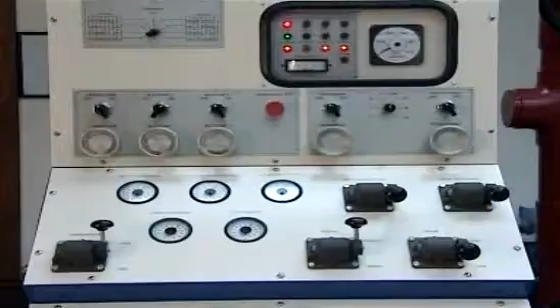As most of these problems can be simulated on the ADC Well Control Training Simulator, this movie is an effort to explain the possible complications, to recognize the indications, and take the appropriate actions in a timely and efficient manner. Welcome to the ADC Simulator, where we make the effort to simulate well control situations which occur on the rig as realistically as possible. In the following few minutes, you will see an enactment of a well control operation and the complications that might arise during this operation.

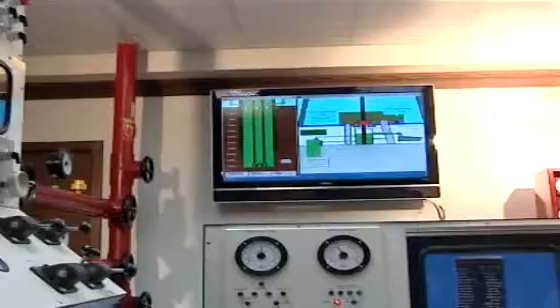Hello, boss. Hello, driller. How are you? Fine, thank you. Hope you had a good rest. Yeah, I'm excellent, in good shape.

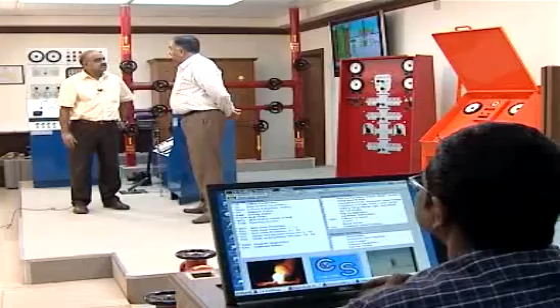Very good. So today we'll be drilling. Okay. And while drilling, these are the parameters you have to keep. Weight on bit will be 25 to 30,000 pounds. Okay. RPM 120. Okay. SPM will be 70. So before you start, driller, make sure all your lineup is okay. Okay. On the rig floor and also on the choke manifold. Send your assistant driller and make sure the lineup is okay. Right.

Check your alarms, and we are entering the pay zone now. Right. So you have to be very careful. Okay. Make sure you set all your alarms. Okay. And if there is any drilling break, please make a flow check. Okay. And if it's flowing, then we will use the hard shut-in method. Sure, sure. Okay.

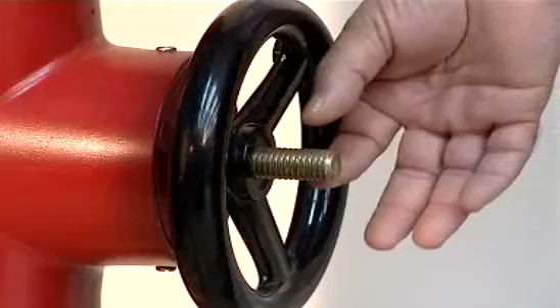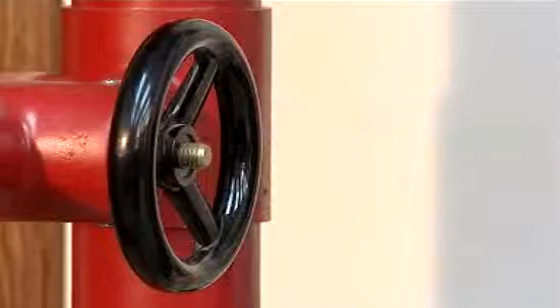I will check the standpipe manifold for correct lineup. Both mud pump number 2 and mud pump number 1 should be lined up. Standpipe number 1, the valve is in open position if the spindle is extended out, and if the valve is in closed position, spindle will be inside. The valve going to standpipe number 2 is in closed position.

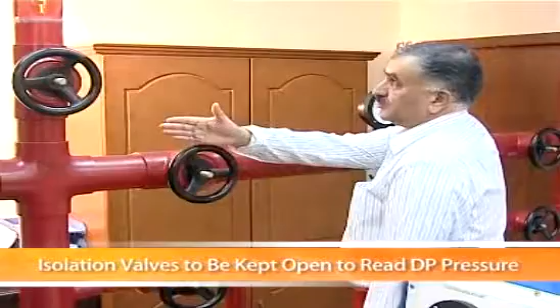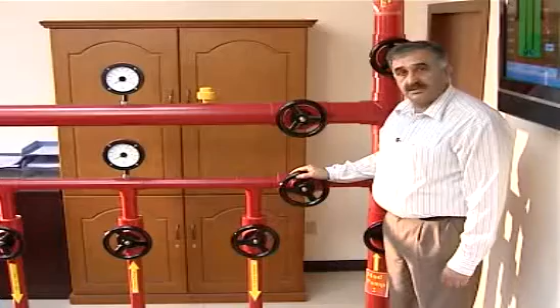This isolation valve in the middle is in open position. Both of these valves are leading to standpipe number 1, which is also in open position. The line coming out from mud pump number 1 is in open position. So both of the mud pumps, mud pump number 2 and mud pump number 1, are lined up to standpipe number 1. All valves on auxiliary lines should be in closed position. Closed, closed, closed, and closed.

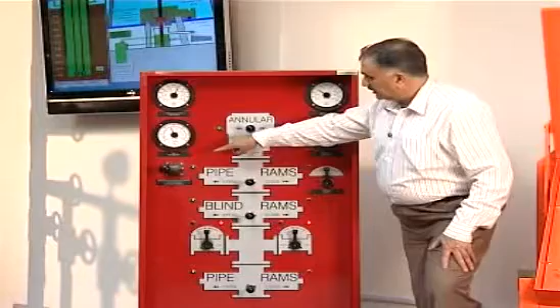Now I am checking BOP remote panel. Accumulator pressure 3000 psi, air pressure 120 psi, manifold pressure 1500 psi, annular pressure 1500 psi. Green light indicates that annular in open position. Green light, upper pipe rams in open position. Green light, blind rams in open position.

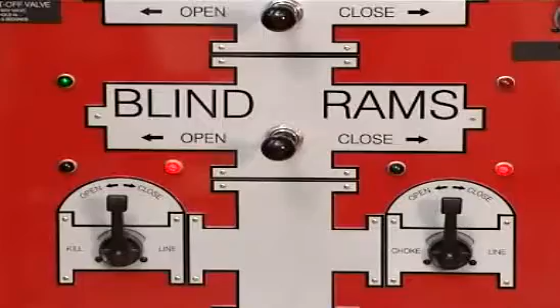Red light, kill line in closed position. Red light, choke line in closed position. Green light, lower pipe rams, which are master pipe rams, are in open position. So all BOPs are in open position. Both kill line and choke line are in closed position.

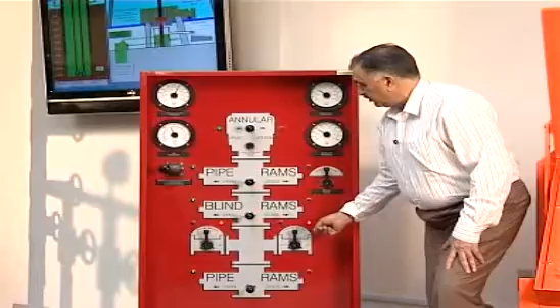As we will be using the hard shut-in method, this is the way we are going to line up the choke manifold. This is the line coming from the BOP and into the block of the choke manifold. From the block of the choke manifold, on this side we have the remote choke which will be in the closed position, and on this side we have the manual choke, which is also in the closed position.

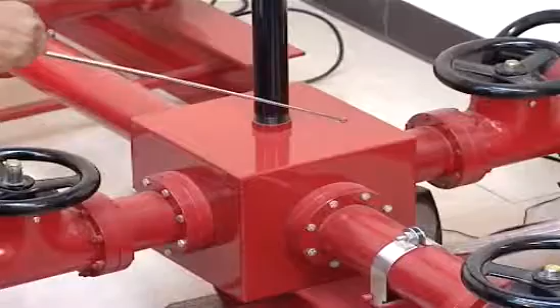The path the mud will take will be from the block through this open upstream valve, remote choke closed, valve downstream open, and out into the mud gas separator. From the block there is also the bypass line with two valves on this line, both of which are in closed position, which is connected to the buffer line, through which it goes to the flare line.

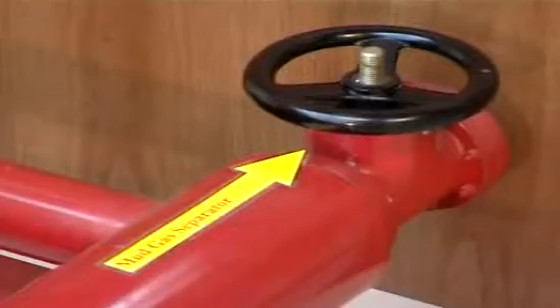This valve upstream of the manual choke is in closed position, the manual choke closed position, the valve downstream of the manual choke also in closed position, and this line also joins the buffer line. These are the gauges mounted on the choke manifold, one for drill pipe pressure and one for casing pressure.

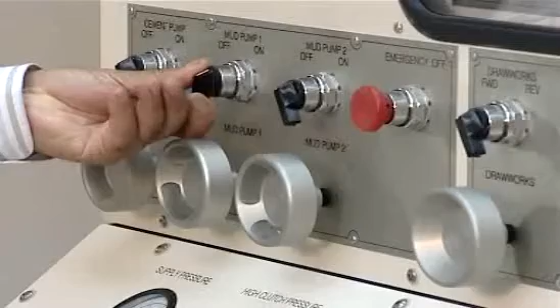To start the engines, press this button. To start the second engine, press this button. Put the mud pump 1 on, and before I go ahead to drill, I will take the slow circulation rate, bring the mud pump to 30 strokes, and I will read the pressure from remote choke panel. Slow circulation rate at 30 SPM, 650 psi.

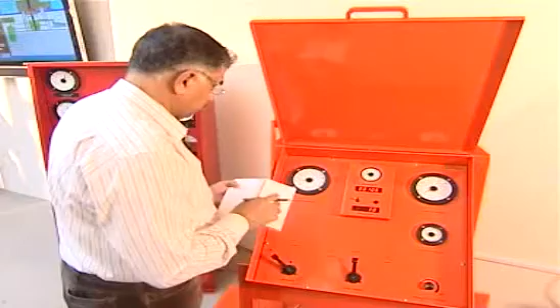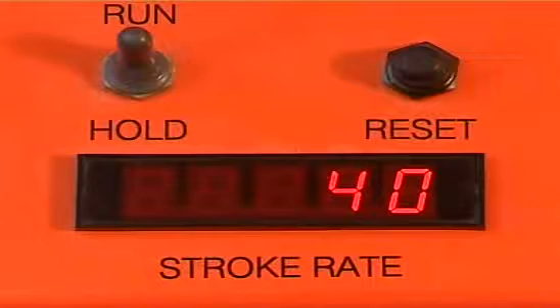I will bring the pump to 40 strokes. I will read the pressure from remote choke panel. Slow circulation rate at 40 SPM, 1150 psi. After taking the slow circulation rate, I will bring the pump speed to 70 SPM, and then I will set the alarms.

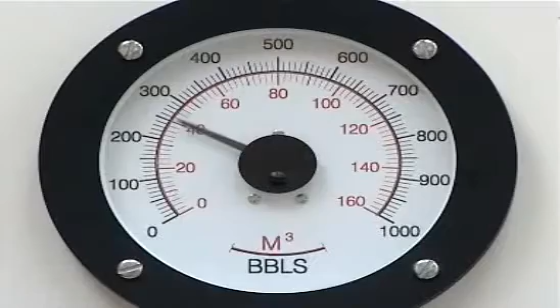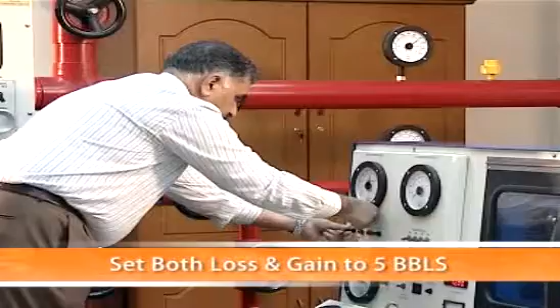Now I will set pit loss and gain alarm. I will switch on mud volume totalizers. For the active system, put the power on. Press this knob to the left and turn lower adjust to the right until I see a red light. Similarly, press high set to the right and turn high adjust to the left until I see a red light.

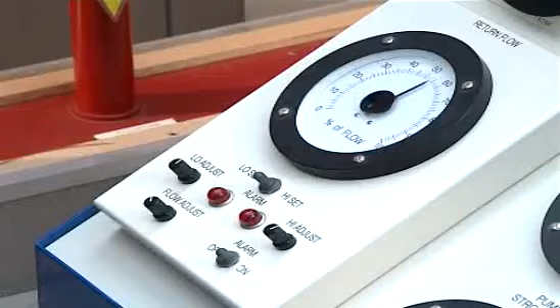Now I will set my flow line sensor for small increase or decrease in flow. So press this one to the left side and then rotate the lower adjust until I hear an alarm. Then press to the right side and rotate high adjust until I hear an alarm. So now you leave it on. Make sure the alarm is in on position.

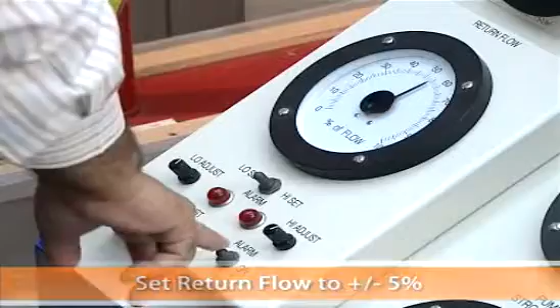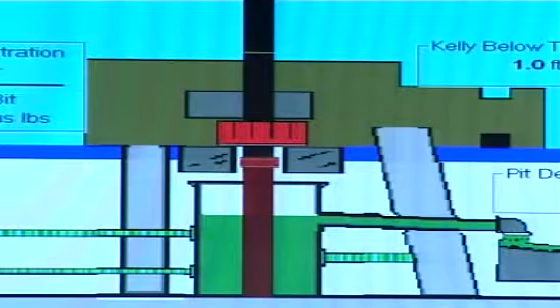I will lower the bit to bottom, and once the kelly drive bushings are sitting inside rotary table, then I will start the rotary. Okay, I'll continue to lower down until I tag bottom.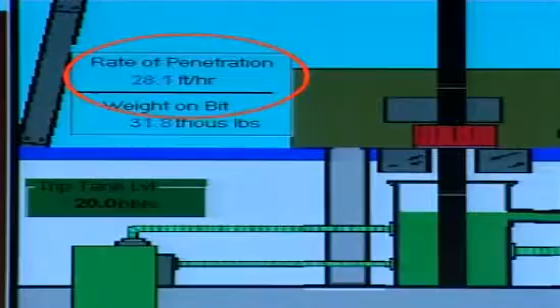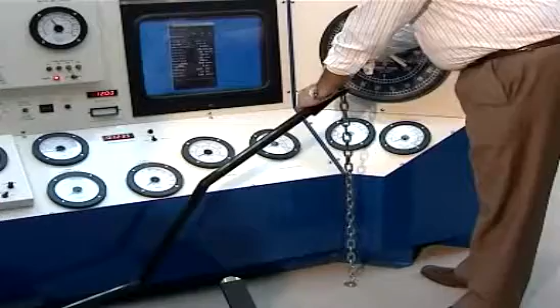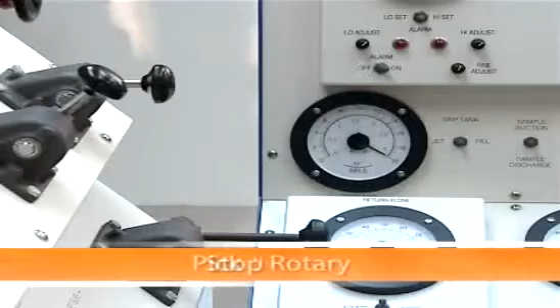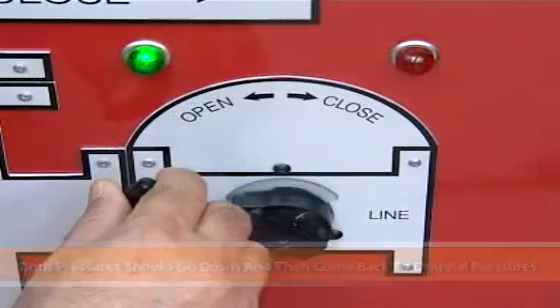I got a drilling break, stop the rotary, disengage the rotary clutch, and now I am picking up. Now I will shut the well in. And open the choke. Well is shut in. Tool pusher, come on rig floor. I have a kick.

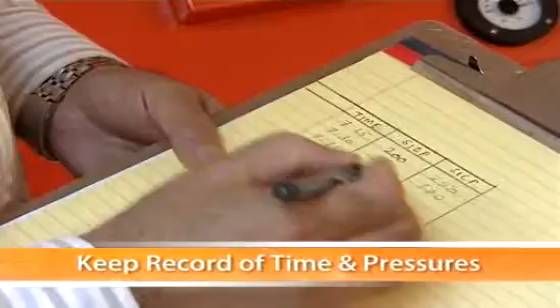Yes, driller, what happened? Well, I made a flow check on drilling break, and the well was flowing. So I shut it in with the upper pipe rams, and I've got shut in drill pipe pressure 810 and shut in casing pressure 900. And what is the pit gain? 4 barrels. Okay, what is the MASP? 1600 psi. That's a very small kick.

I think we can manage to kill it very easily. So I will go just round, make a quick check and come back. In the meantime, you keep monitoring the pressures to check for migration. Make sure that the pressure does not exceed the MASP. But in any way, if it is going more than 200 psi than what it is now, please call me. Okay? Okay.

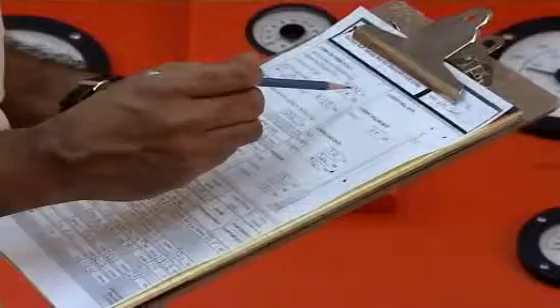Okay, the kill sheet is now ready. The MASP is going to be 1690 psi. We will be pumping at 30 SPM, and the strokes to displace the string volume is 2326. The open hole volume is 1719 strokes. The total annulus volume or the bottoms up is 6513 strokes, and the total volume to kill the well is 8838 strokes.

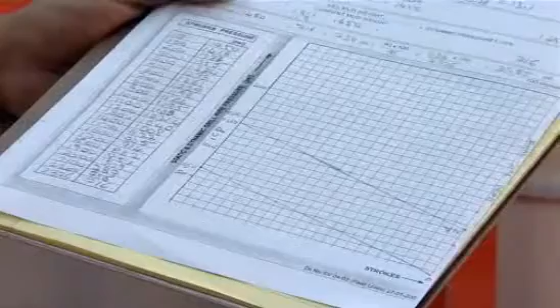The kill mud we will use is 13.2 ppg, and we have the pressure schedule here, the pressure drop for every 100 strokes of kill mud pumped, and these are the graphs for this schedule.

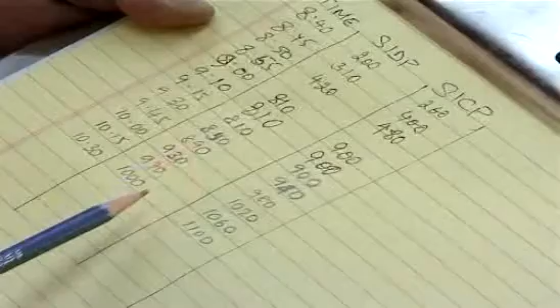The stabilized pressure at 9 o'clock was 810 psi on the drill pipe and 900 psi on the casing. It stayed like that till 9:15, and after that we are seeing some gas migration, and the pressure at this time at 10:30 is 1000 psi on the drill pipe and 1100 on the casing. That means there has been an increase of about 200 psi. As we have had an increase of 200 psi due to gas migration, the first thing that we will do now is to bleed off this excess 200 psi to restore the bottom hole pressure to its original value.

To reduce the drill pipe pressure by 200, we have to be looking at the casing pressure gauge, because there is a time delay of 1 second for every 1000 feet of the well depth. So now I am going to reduce the pressure on the casing side by about 100 psi, and then we will see a corresponding drop on the drill pipe gauge after a few seconds. The drill pipe pressure is now 850 psi. That is about 40 psi more than when we initially shut in the well. So we can now start killing the well.

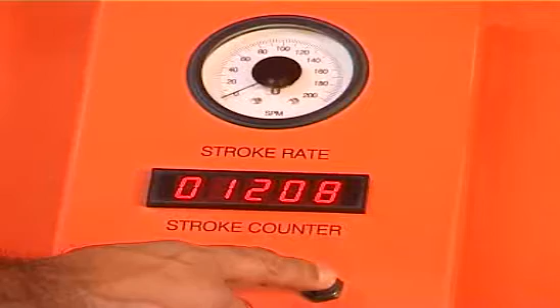Driller, the kill mud is ready, so have the derrick man line up the kill mud. We will be killing this well with 30 SPM using the wait and weight method. So I want you to increase the pump in stages, 5, 10, 15, all the way to 30 as I give you the signal. First of all, we will reset the stroke counter. Okay, driller, give me 5 strokes please. We will bring up the pump to the kill speed in stages, holding the casing pressure constant by opening the choke as necessary.

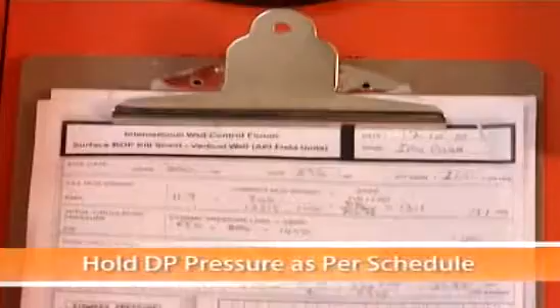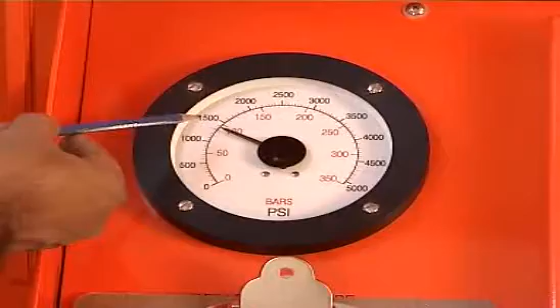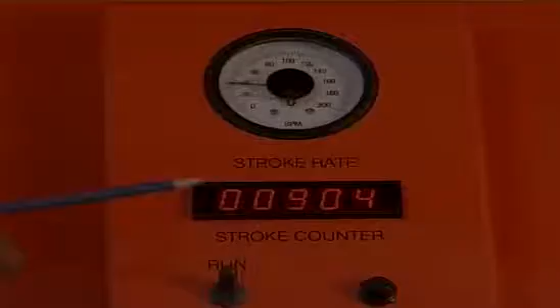Now that we have the pump rate up to kill rate speed, we will now follow the schedule as we have calculated in the kill sheet. We have now pumped 213 strokes. We have a pressure of about 1400 psi, and we need to keep, as per the schedule, 1380 psi, which means we are 20 psi over balance, which means everything is going well. We have now pumped 904 strokes. The pressure is about 1200 psi. As per our graph, we should have 1160 psi. So we have now 40 psi over balance, which means still everything is okay.

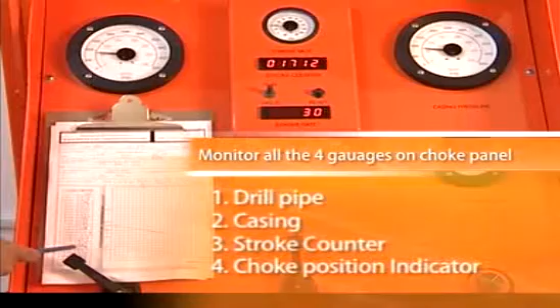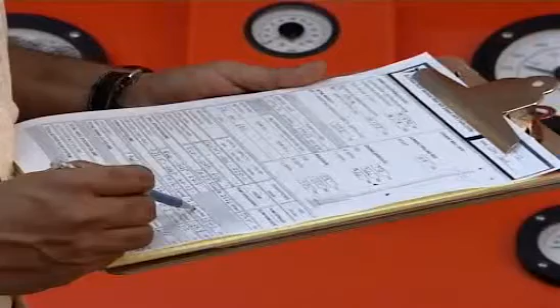We have pumped now about 1700 strokes. On the drill pipe side, we have about 950 psi. As per our schedule, we should be having 915. So we are still over balanced by about 35 psi, which means everything is still okay. The casing pressure has been rising steadily as the gas expands as it comes up the hole. Since we have already pumped 2000 strokes, we do not worry about the MASP anymore, because the influx is already inside the casing.

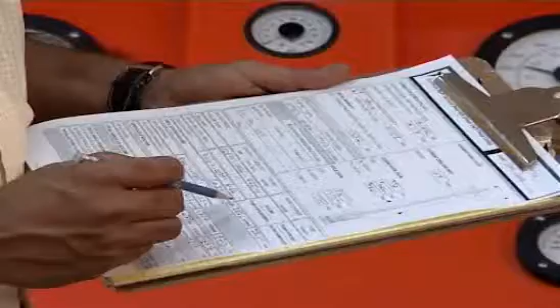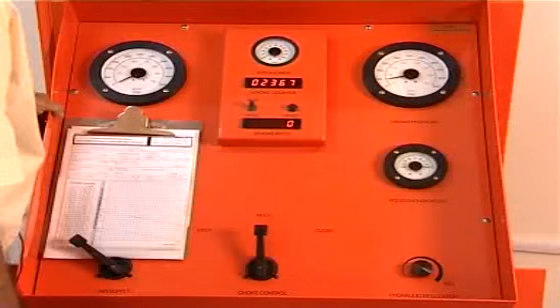We have now pumped 2367 strokes, which means we have displaced the drill string with the kill mud. We are now at the final circulating pressure, which according to our calculation should be 716, and the gauge is showing 750, which means we are 35 psi over balance and everything is okay. We have now shut down the pump after pumping the string volume to check for pressures. The pressure on the drill pipe side is 0. That means the well is dead from the string side.

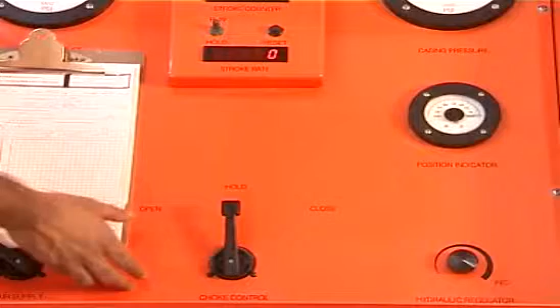Okay, driller, give me 5 strokes please. We will bring up the pump to the kill speed in stages, holding the casing pressure constant by opening the choke as necessary.

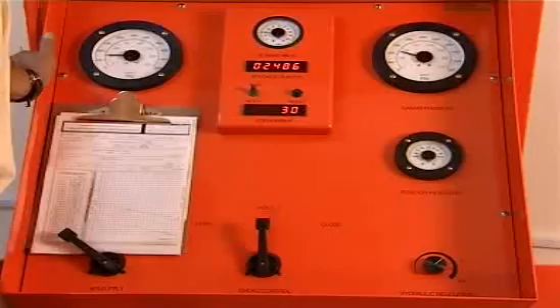Oh, the pressure seems to be going up on the casing side. The casing pressure has climbed up from 1100 to about 1400. That's 300 psi more than normal. The drill pipe pressure also has climbed up by about 300 psi. Okay, driller, put the pump off. Totally off.

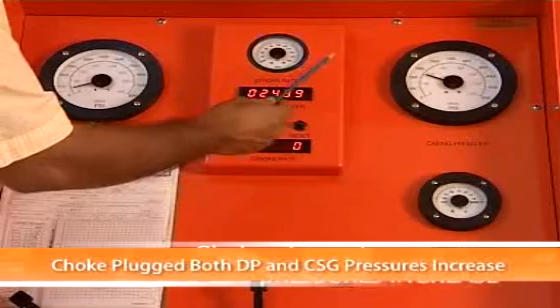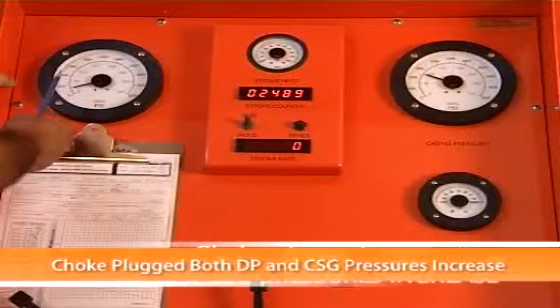We noticed that first the casing pressure started to go up, and after some time the drill pipe pressure also started to go up. Looks like we are having a plugged choke. So I asked the driller to shut down the pump immediately, and I closed the choke as well.

Now the drill pipe pressure should have been 0 because we have already pumped the kill mud down the drill string, but it is showing about 300 psi, which means this is some trapped pressure. So the next step would be to bleed off this trapped pressure and repair the choke or change the choke.

We have just repaired the remote choke, and we are going to start the kill operation again. We will again come back to kill rate speed by holding the casing pressure constant. Driller, 5 strokes please. Ten please. Okay, we are back to the killing operation. Drill pipe pressure is now at 750. Casing pressure still at 1100. Everything seems to be okay.

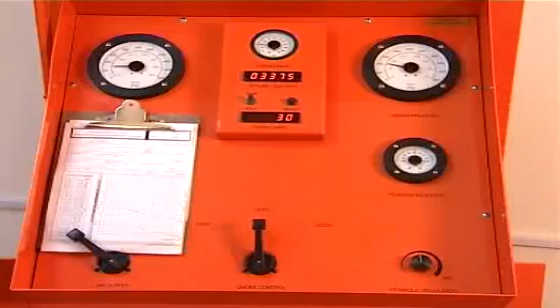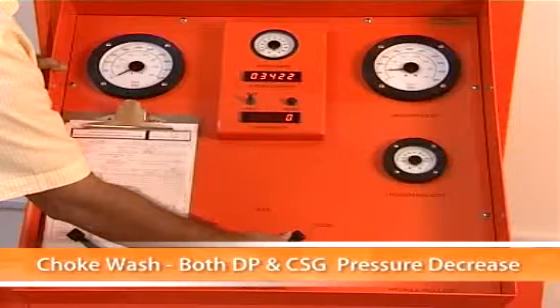Okay, I am seeing both the pressures coming down now. So I am closing the choke. In spite of my closing the choke, there is no reaction. Seems like there is a choke washout. Okay, driller, put off the pump. Since the choke is washed out, I have to close the HCR.

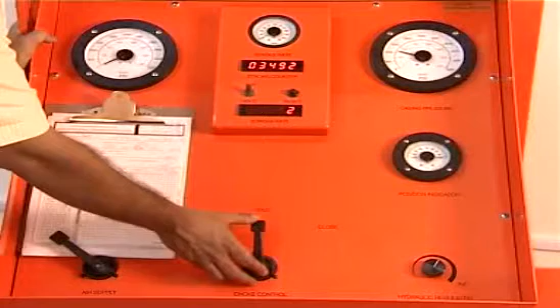Okay, we have repaired the remote choke now, and we're going to start the kill operation again. We will bring up this pump to speed holding the casing pressure constant. Driller, give me 5 strokes please. 15. We are back to kill pump rate, and the drill pipe pressure is showing 750 psi. Pressure is 750. Seems okay.

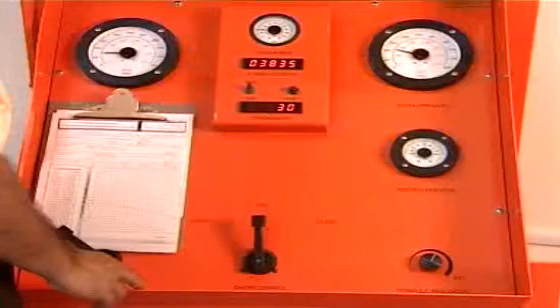Seems like the pump is down. Driller, the pump is off. Call the electrician and let's get it fixed again. Driller, since pump number 1 cannot be started, let's start with pump number 2.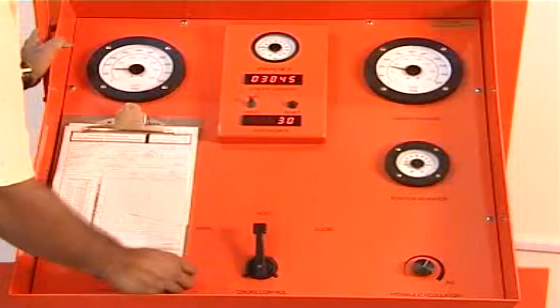We have lined up standpipe number 2 with pump number 2, and we are going to start the kill operation again. We will bring the pump up to speed holding casing pressure constant. Driller, give me 5 please. 15. 30. We have now pumped 3,045 strokes. We are still holding the FCP about 800. Casing pressure is showing about 1000 psi.

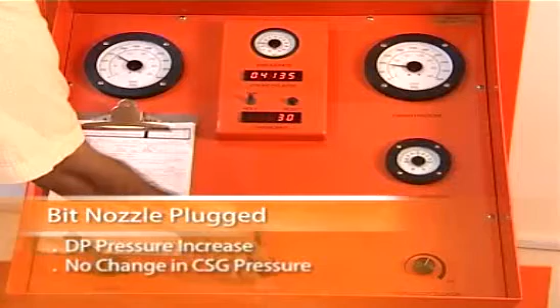The drill pipe pressure has shot up suddenly. There is no change in the casing pressure. Seems like the bit nozzle is plugged. Driller, let's shut down the operation. Reduce by 5 strokes. Shutting down the well, keeping casing pressure constant. Okay, put it off completely, the pump.

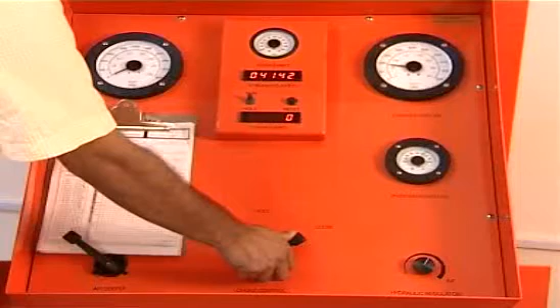Driller, looks like the bit nozzle was plugged. The drill pipe pressure went up, but there was no change in the casing pressure. So there's not much we can do now. Let's bring the pump back up to speed, holding casing pressure constant, and whatever we see on the drill pipe will be our final circulating pressure now.

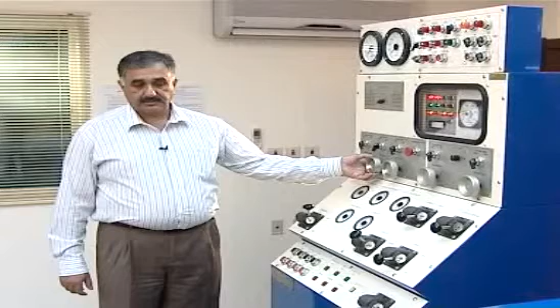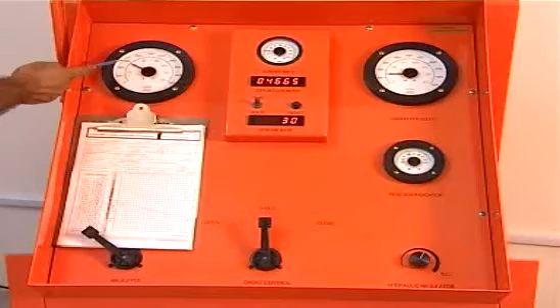Driller, give me 5 please. Give me 10. Give me 15. Give me 20. Give me 30. We are circulating at 1500 psi because of the plugged nozzle. The gas is also coming to surface. We can hear the sound of the gas.

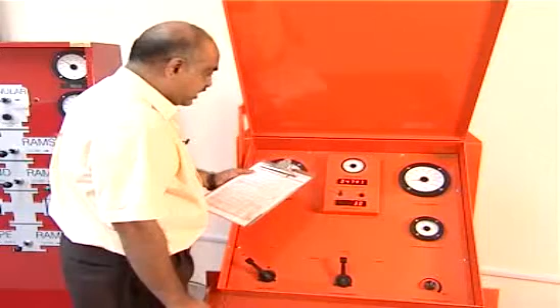The calculated bottoms up strokes was 4794 and we are now almost there with 4756. We can still hear the gas coming out, and as the gas comes out we can see the casing pressure has gone down. Drill pipe pressure is still at 1500 psi, so everything seems to be okay. The drill pipe pressure is still at 1500 psi and all the gas seems to be out. There is no more sound of gas coming.

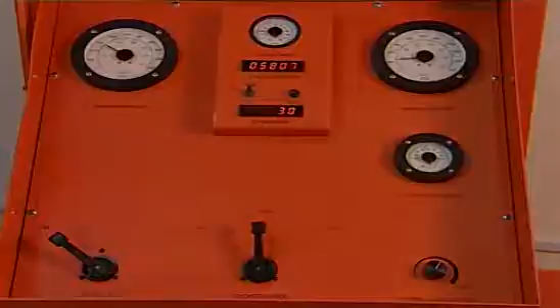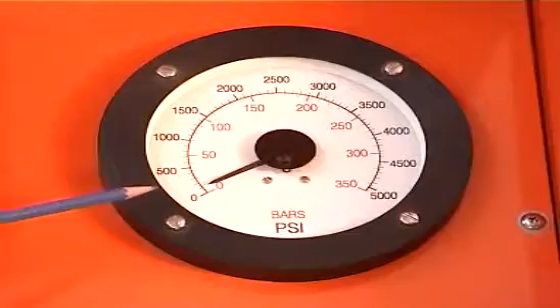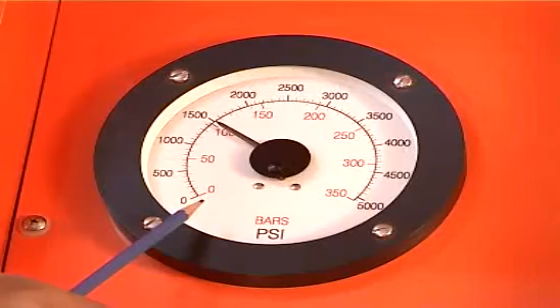We have pumped 9225 strokes. Casing pressure is almost zero. The choke is fully open. Drill pipe pressure is still 1500 psi. It is now time to shut down and check if there are any pressures left in the well. Driller, we will start to shut down the killing operation now. So please reduce the pump strokes 5 by 5.

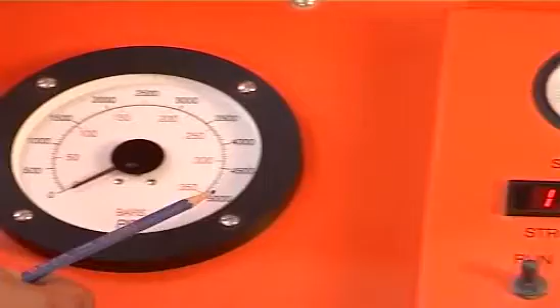Okay. Okay. Okay. Okay. Put the pump off, please. We have pumped about 10,000 strokes now. Drill pipe pressure is showing 0. Casing pressure is also showing 0. It looks like the well is dead.

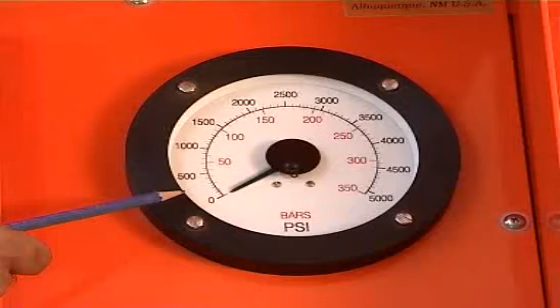We will now flow check through the choke manifold. The choke is now wide open and there is no more flow from the well. The well is dead. We will now open the BOPs and go back to drilling. Driller, great job. With all these complications, we managed to kill the well safely. Thank you very much.

I thank you for taking the time to watch this video, and I hope that your understanding of well killing operation will become a bit clearer.